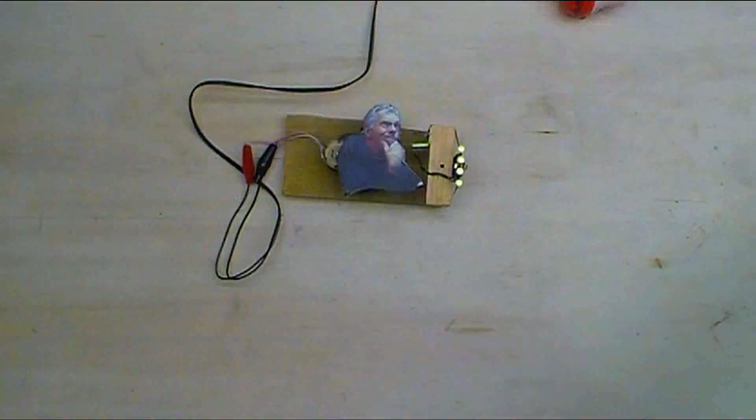So what's up in this episode? Inspection, that's what. We're going to take a look at the primary drive chain, see if there's any stretch on that, whether or not I need to replace it. The cam chain, we're going to look at that, see if that's stretched at all. And I'll also show you how I rounded up all of the bolts that I need for the crankcase halves to go together, and how I determined which ones go where.

We're looking at the lower crankcase half here. This is the tensioner for the primary drive chain. What I'll do is get everything back together, put the top half of the crankcase back on, and then from underneath we're going to push that up, and we're going to look in the book on the specification as to how far that's allowed to go, and that'll tell me how much stretch there is in the chain.

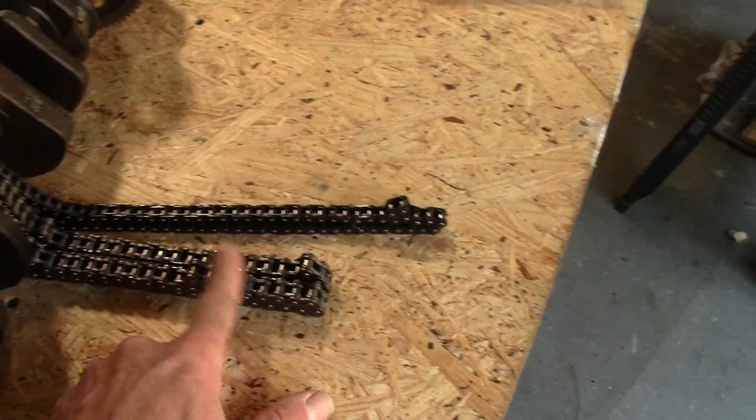And I'll also need to check out the cam chain. That's the smaller one right here. The primary drive is 2 chains. To do that, I'll have to go ahead and put everything temporarily together, slide the cylinders on, put the head in place, drop the camshaft in, same kind of thing. We're going to look at the tensioners and how far they travel. That'll tell me if those 2 chains need to be replaced.

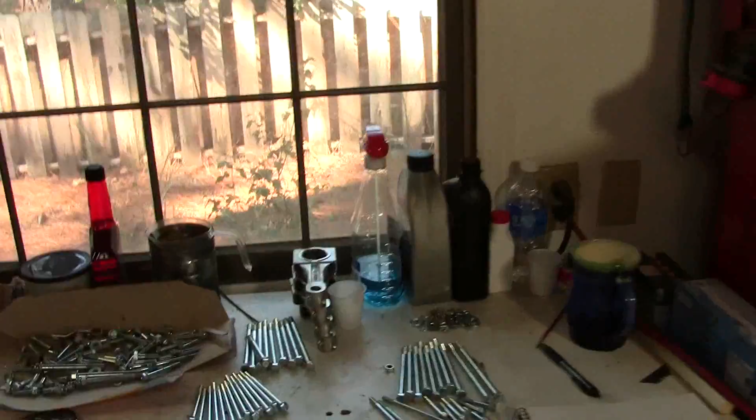Well, before we get into all that inspection over there, we're going to take a look on the bench here. I'll show you how I figured out which bolts go where in the crankcase out of all these miscellaneous bolts I have here. You can imagine when I first looked at this and I see all these bolts and all these holes in the crankcase, where do they go? Well, I went on House of Honda website.

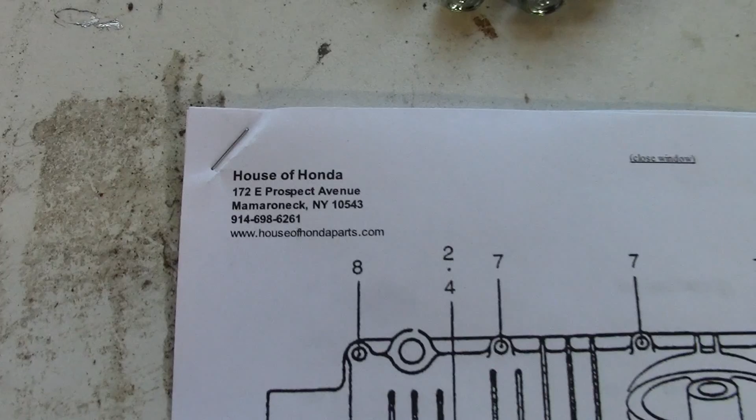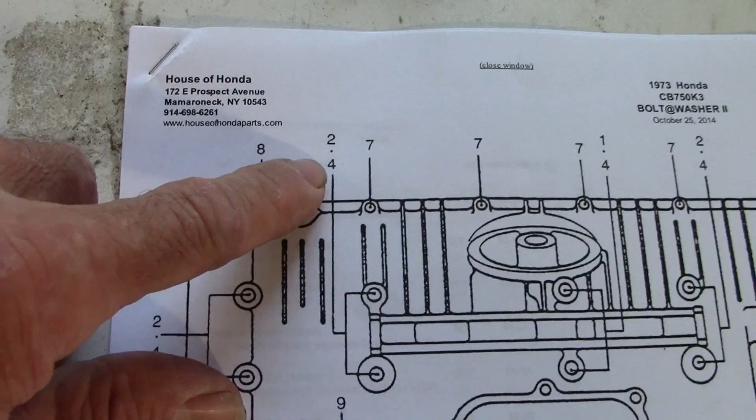Any website that has OEM drawings will have a drawing like this. This shows you the bottom of the crankcase, and all these little numbers and lines point to the holes and what goes in there. So each one of these is a number on a list. For instance, let's take a look at these 2 right here. They're the same number, which shows that it needs a number 2 part and a number 4 part from our list. We'll go over here to the list.

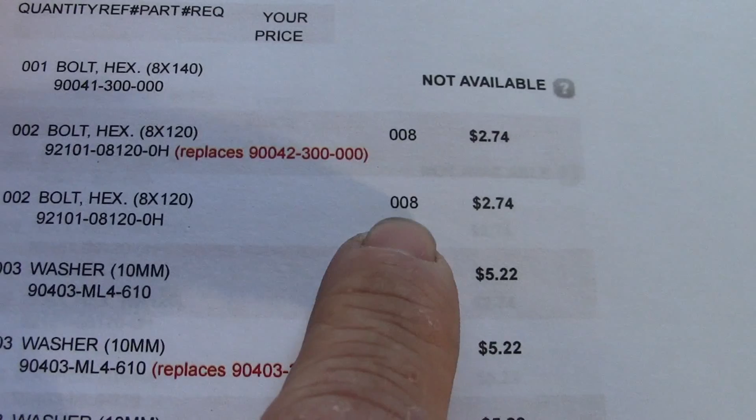Let's look up number 2. Number 2 is a bolt hex 8 by 120. How about that? And we need 8 of those. So then I go over here to my pile of bolts, and if I look around through them and get out my calipers here that I've got set to 120 millimeters, well, look at that. You can see that that's 120. So that's the bolt that goes there.

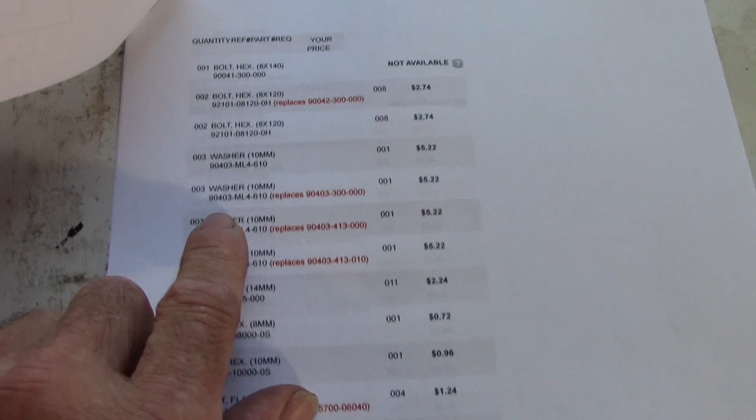And then the other thing that goes with it was a washer right here, and that's how many of those you need. And so you can just use this list like this to determine exactly where all those bolts go.

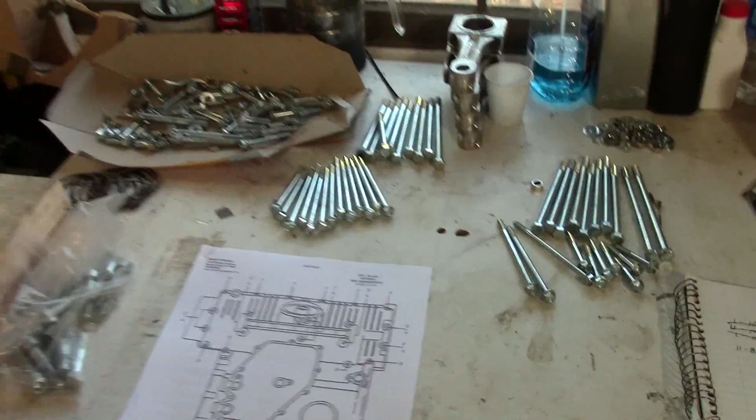And when I got all done, out of all of these bolts that I have here, it turns out that I've got a lot of extras. I think, as I've said before, there's pretty much 2 of everything. I think this guy bought another bike and parted it out, or maybe had one he parted out, but that pile right there represents everything I need to bolt the case halves together. That's it. And then there was a few miscellaneous washers. I went to a hardware store and bought some good hardened washers for those rather than just cheapy ones.

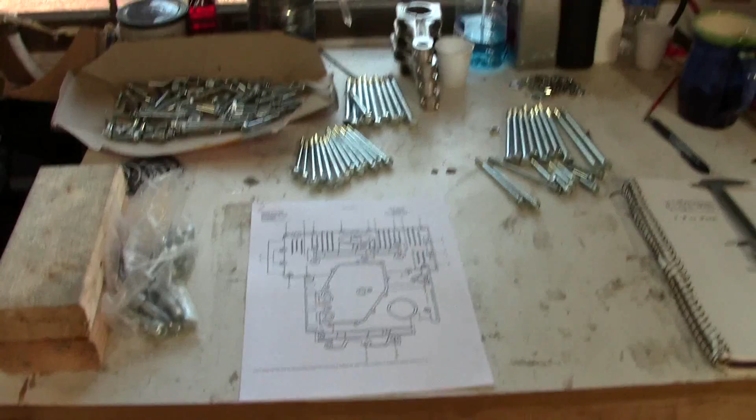So that's the way that I figured out where the bolts go. You can do the same thing on probably any bike that you're putting together. If you've got a pile of parts that somebody else took apart, there's a good way to go about it. And there's also one for the top of the crankcase as well, and all of those bolts that go in there. In fact, every single thing on the bike is like that. So good little tip there to figure out where things go.

Well, let's get back over to the engine now. Here's the crankshaft. What's going to happen now is I'm going to clean this all up, get all the dust off all the journals, and get all the dust off from all of the bearings everywhere, because this has been sitting out.

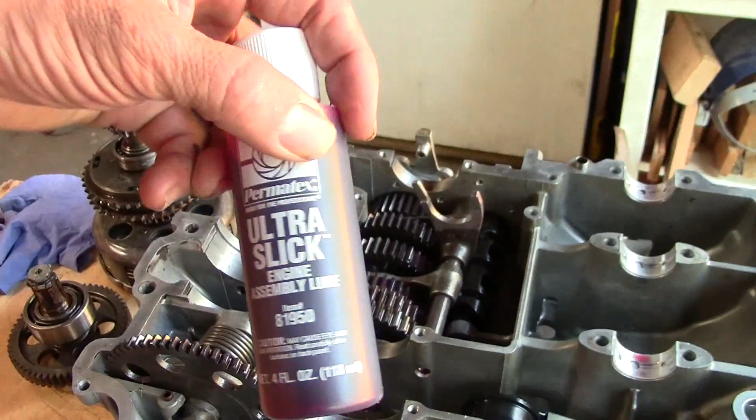I want to make sure there's no little bits of anything in there at all. We're going to clean all that up really well, then use some assembly lube, which is this red stuff you already see in the engine that the previous owner was using when he was putting it together.

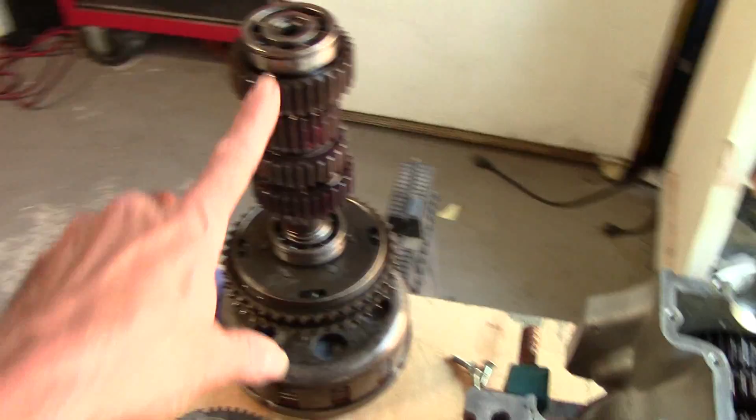We're going to put assembly lube on every single bearing surface, then put the transmission shaft back in, put the crankshaft back in, and put the top of the crankcase on. I'll probably just put a couple of bolts in there to hold it together, then thread the camshaft chain up through everything and just let it sit.

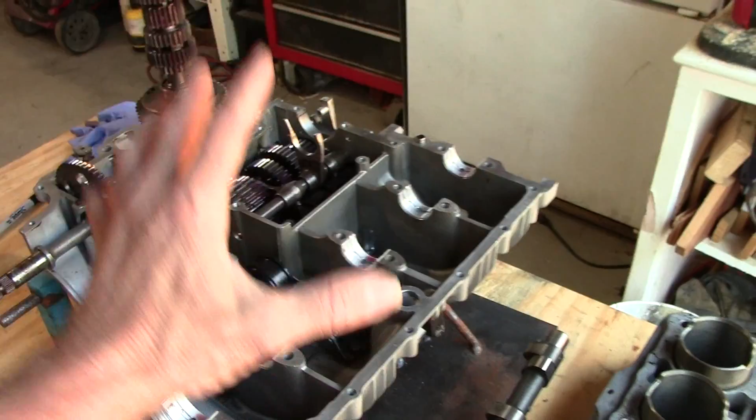The first thing we'll check is the primary drive chain, and once we get that determined, we'll go ahead and slide on the cylinders, put on the cylinder head, get the cam in place, and check out the cam chain. Just clean off all these journals really well.

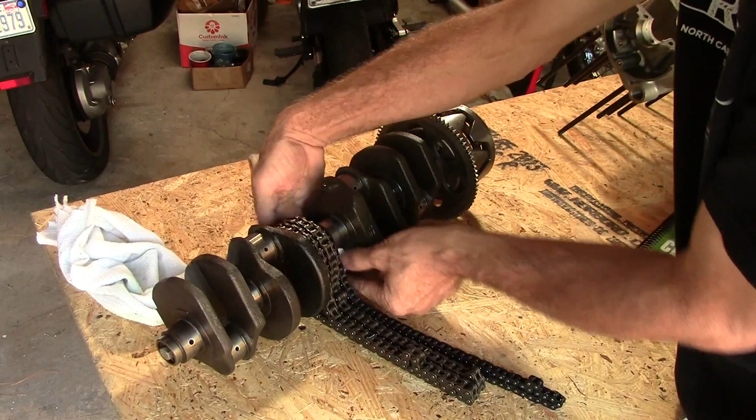Get all the dust, crud, everything out of the way. We don't want any contaminants in there at all. It's really important to keep everything clean on the crankshaft and camshaft journals.

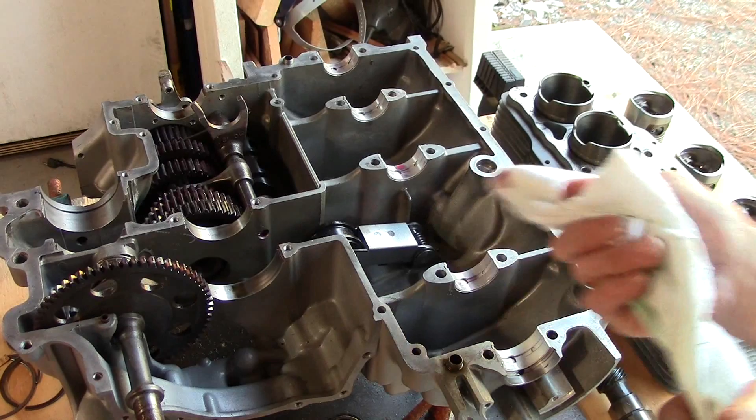We'll wipe down all the bearing shells, get all the foreign matter out of there. Don't want anything in there. This stuff is really soft - you can scratch it with a fingernail even.

Over here where the transmission shaft goes, those are ball bearings in there, and they will just drop right in. I'm going to just clean that off as well.

We'll just wipe down the top of the case half. We don't want anything in there that could get squished between the two pieces and cause any damage. Clean, clean, clean - everything nice and clean.

And over here on the top of the crankcase, same thing - let's just clean it all up really well.

Now right here, there's these grooves that hold these bearings into place with a clip. The clip goes in there and it keeps the bearings from moving back and forth.

I recently saw a post on one of the websites where someone asked why the transmission shaft was coming through the side of their engine after they did a rebuild. It was literally cracking, and I pretty much figured what they did was probably left out those clips. Not a good thing.

Let's get some assembly lube on each one of these. The stuff is pretty thick - just put a little bit on each one.

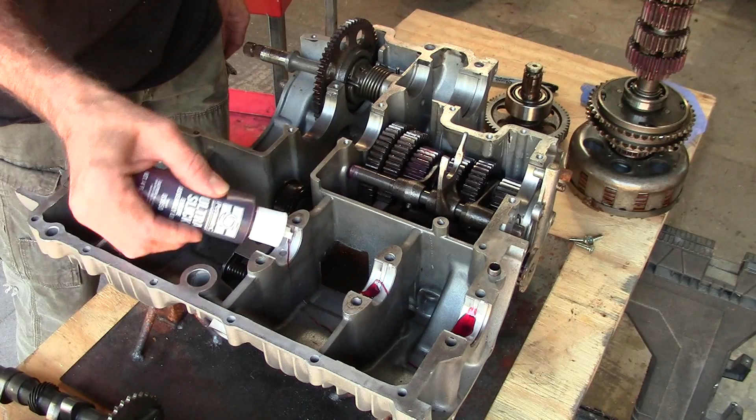Just smear that around a little with my finger. You can see how stringy it is - it's really tenacious, and the reason you put it on is when you first crank over the engine, this will provide some lubrication until the oil pump gets primed and actually starts putting out oil pressure.

Put a little bit of it on the fork, the shift fork here as well - give that just a little bit extra lube. Can't hurt a thing, pretty much anything that spins around. The gears have already been lubed up pretty well.

Now we're ready to drop the crankshaft in. Not literally drop, but gently place it in there.

Okay, that looks good. We'll let the cam chain hang forward. We'll leave the primary drive chain alone for now, right here.

And I'm going to grab the transmission shaft, and we've got to put the chain over the top of that. So what I'll do is just lift up the chain like this, get it threaded over everything, and get the chain on the sprockets.

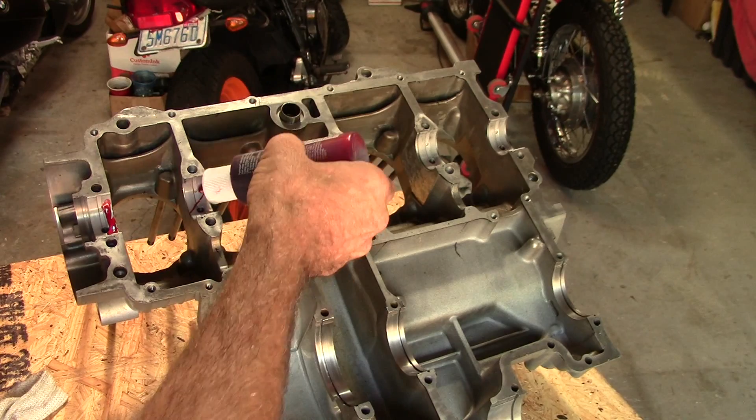Same thing, we'll smear that in with the finger a little bit, making sure it's covering the whole bearing surface. And we're ready to drop this thing onto the lower half.

Okay, so I'm going to take the timing chain and just kind of let it sit like this. I can reach down in there and pull it back up that way. It's out of the way of everything so that the case half will go right on there.

I will get the case half over here and gently set it down on everything. It'll just kind of drop into place on the alignment dowels. Now back here it's hanging up a little bit because I need to line up those grooves.

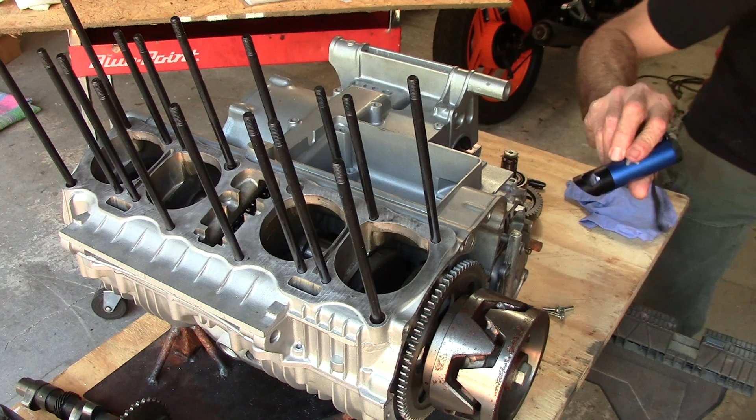Get a flashlight to take a look in here. It's got to go that way just a little bit. Still hanging up a little bit on one of them here. There it goes. Make sure it's down all the way.

Now we'll reach in here and scoop up that timing chain. That's that. Okay, now we can get a couple of bolts into the crankcase halves to hold them together.

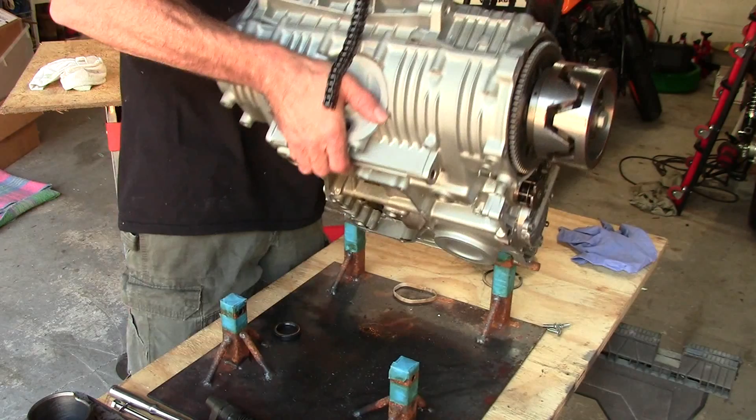Well, the previous owner built this temporary stand. He welded it together, and the way it's designed, you can actually tip up the crankcase just like this. So I can get underneath here and put a few bolts in.

Let's see, the ones I'm after are going to be these right here, and these right here. I'm only after snug at this point, not torqued to spec, just good and snug. All right.

Now let's take a look at that primary drive and see what the slack is there. Okay, let's flip the entire thing over now.

Carefully, gotta make sure that I don't get this past the point of no return on my sawhorses here. Alright, let's get a closer look.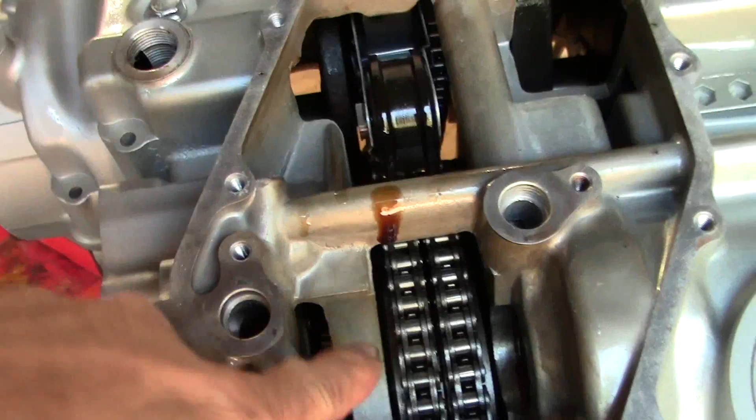So there's the primary drive chain, and right here is the tensioner. You can see that it can move a little bit, right there. And what we're going to look at is a certain dimension between this edge and part of the tensioner. If we go over here to the manual, you can see exactly what's going on and where to put the vernier caliper to do the measurement.

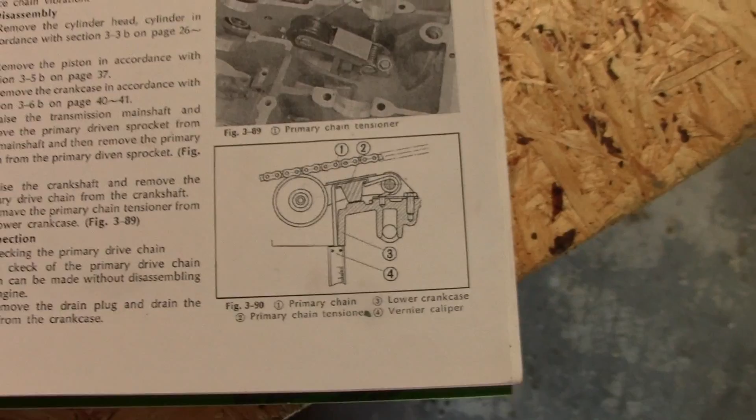And I looked it up, and if it's 70 millimeters or more, time to replace the primary drive chains. So let's get in there and measure it up and see what we got.

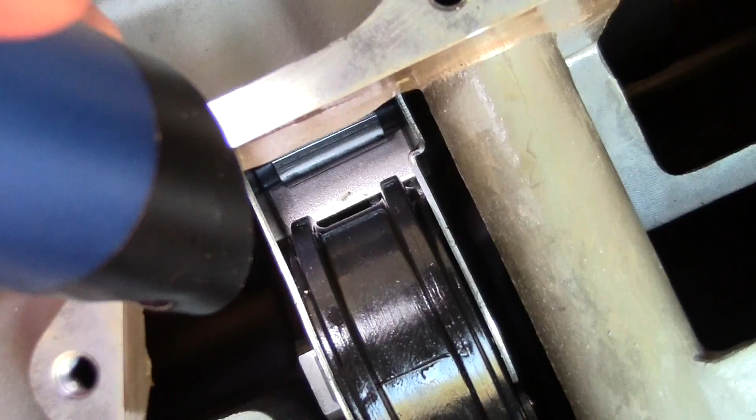The place we want to measure is right there behind that wheel, that shiny flat surface that you see. We want to measure there between that and the edge right here of the crankcase, and that's going to be our dimension that we're after.

Okay, let's make sure we're set to zero. I'm going to use the depth gauge end here. Just push it down in there, make sure it's got full tension on it.

Right there, and our measurement is 64 millimeters. So that's good. That means there's 6 millimeters left of wear in there. That's good. That's a primary drive that's in good shape.

So that's good news. Now we can move on to the cam chain. I've looked through my books and I can't really find a specific measurement like with a depth gauge on the stretch on the cam chain.

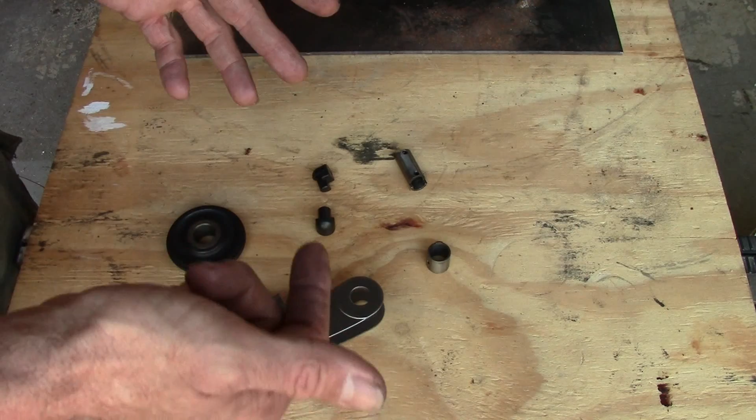So what we'll do is we'll just put everything together and use the tensioner itself and the travel on there to determine how much wear is left. It does have a limit. It can only push the chain tension so far.

So anyway, we've got to assemble the cam chain tensioner. This is all brand new parts right here, and the way this is all going to go together is actually on the chain itself. You have to thread the chain through here, then you put all this stuff together.

This little bushing right here has a notch in it on one side right there, and that notch will stick out and it will go into that little place right there on the roller holder, and that's what will keep that in place.

And then these two rubber things will insert here into the dowel pin, the shaft that goes through that tensioner, and that's what holds it in place in the crankcase. So let's get a little different view here and we'll put it all together.

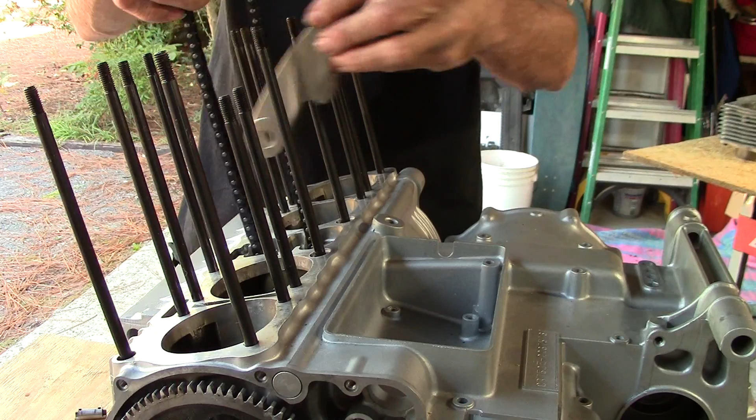Okay, here we go. So let's pull the chain up like this. We're going to take the tensioner and drop it on there. The small wheel will go toward the top, the big wheel towards the bottom, and the small wheel is outside the chain pointing toward the back of the bike. This flat section is what the tensioner pushes against, and that points towards the back of the bike.

And we'll take the lower wheel with that small insert in it, noting where the tab is. That little tab is facing towards me. We'll go ahead and push that in there and rotate it around until the little tab lines up. It's a little bit tricky. Another pair of hands would be nice.

Okay, now we'll get the pin through there. You might have to wiggle the wheel back and forth a little bit to get it to poke through. Okay, that's through. Now we put the rubbers in, little rubber mounts, into the pin. They go a certain way so that they lock into place. It's pretty obvious.

Now these will rotate around to where the flat side of the rubber is pointing up, and then it goes down here and drops right into this spot on the crankcase very nicely, just like that. You'll notice that they'll want to rotate a little bit, but when the cylinders are on there, they'll be held in place okay. Alright, so that takes care of the tensioner.

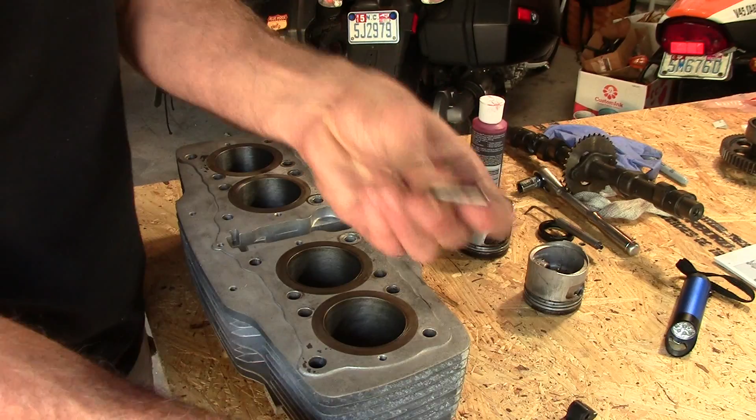So here we have the cylinder. Here's the guide. This is the pin for the guide, the lower pin. And these two parts right here, we're going to drop into the cylinder and go into those slots right there. This is towards the front of the bike. This side with the raised groove on it, this little notch, that points towards the chain.

So what we'll do is we'll just drop that in there like that. It drops into those two slots, so you can see that it's free to move around. Let's just turn this around, take the little pin, push it through the lower portion, center it up nicely.

Now we'll take this and put it onto the crankcase. Now what you're after here is to get that pin that I just put through that lower tensioner to go right into these two grooves on the crankcase.

Okay, now things get a little tricky here. This is where some assistance is nice. I wish I could get all these crows down here to help me. Anyway, I got a piece of copper wire on the chain here, and I'm going to thread that through the cylinder down here where the chain would go.

And then pull it up over the top, kind of hang on to it at the same time that we get the cylinder up onto the studs. I'm going to take this piece of wire and just bend it over. That'll hold the chain for me. Now I can line up the cylinder on the studs.

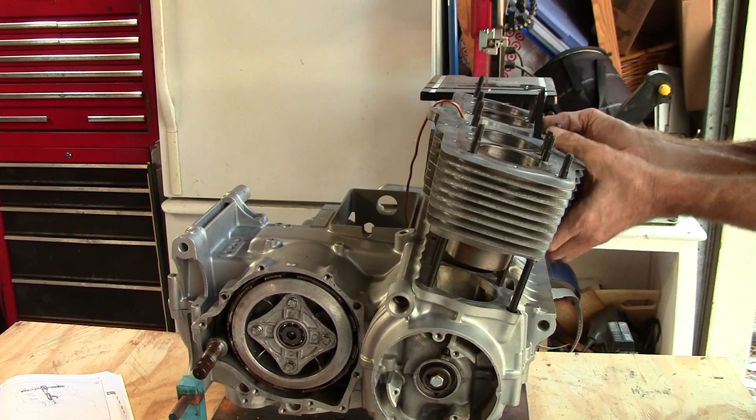Now you can imagine doing all this with the gaskets and everything in place, and then having to put pistons in and line up the rings and all that jazz. So that's why people have made that suggestion of making the wood blocks when it comes time to do the rings. Okay, so let's pull that up.

Make sure that this is pushed in all the way. And we're going to also make sure that as we lower it down, everything clears okay. And let's not drop that chain.

You may have to push the tensioner back a little. And then take a peek underneath. Make sure the tensioner's lining up in the slots. Or the guide, I mean. Make sure the guide is lined up in the slots. There we go. It's on there.

So now I can take this piece of copper wire and just put it there to hold the chain in place for me for now. This is the cam chain tensioner.

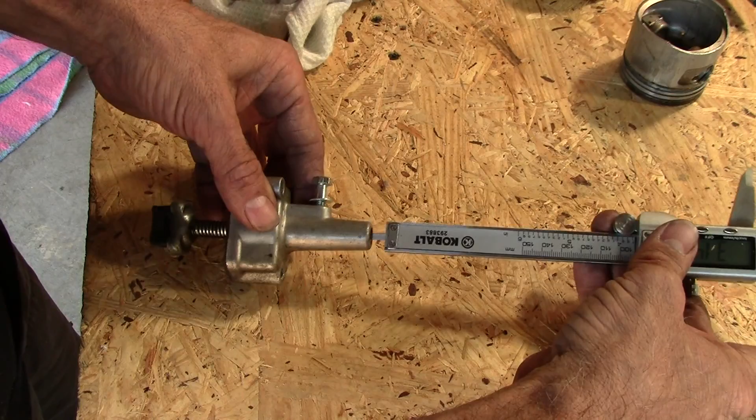I'll loosen up this bolt right here, and you can see it can move in and out with that spring. So that's the maximum travel we get right there. What I can do is take my calipers, turn them on, zero them out, use the depth gauge, and since it's all the way out right now, I can poke it down in there and get an idea of that dimension. That's about 23.95 millimeters, so let's lock that down.

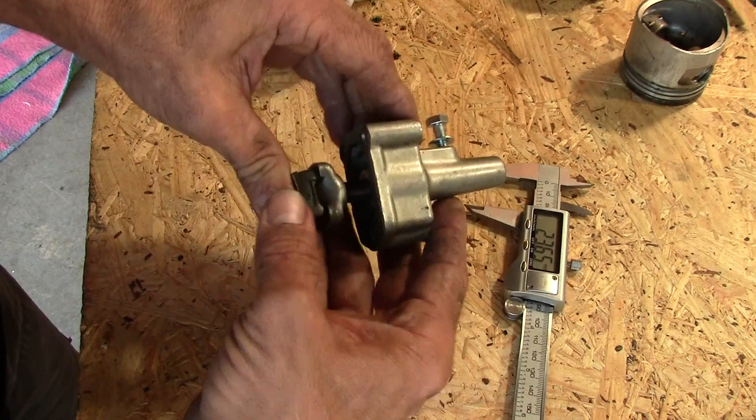Now we'll take this and push it all the way back, tighten up the screw just a little bit, lock it in place, and then we'll put this onto the cylinder and attach it with the bolts and tighten it down. Let's put the tensioner on there.

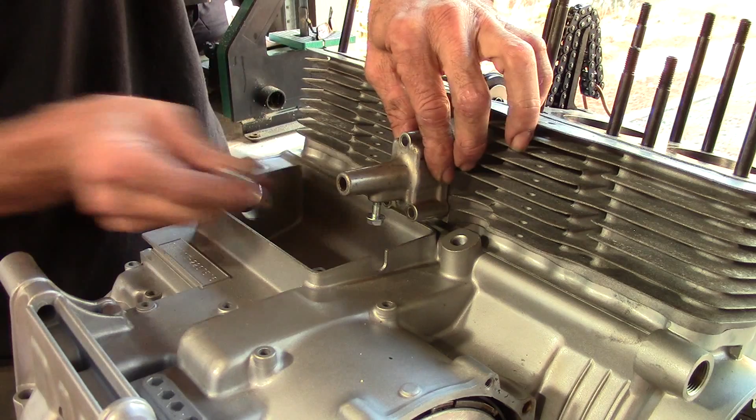We'll get some bolts in there to hold it in place, and spin those in. Just like everything else, we're only after snug right now. It doesn't have to be completely torqued down - this is just to check things out.

All of this is really worth doing, because if you do it later and find out the chain is stretched, how much does that suck? You've got all your gasket material on there, and you've got to back up and do it all over again. Now we're ready to put the cylinder head on.

I have two complete engine gasket sets - one has been opened, the other has not. From the opened one I pulled out a head gasket because I want this thickness on here so it raises the head up to the proper dimension it'll be when the engine's finally together, because that may affect a little bit of the tension on the chain.

The further up it is, of course, the tighter the chain will be. I probably could have put the base gasket down below the cylinder, but it's pretty thin - I really don't think it would make much difference. This one is almost a millimeter thick, so it's really worth taking the time to put it on.

Alright, let's drop this in place. There we go. Now we'll get the cylinder up there. Same procedure - we're going to take this piece of copper and poke it through the cylinder head in the same location that the chain goes.

And let's pull that through and bend the wire over. Now we can line up the studs. Where are you guys? Oops - that's okay, because I got the wire there. Alright, pull that back up.

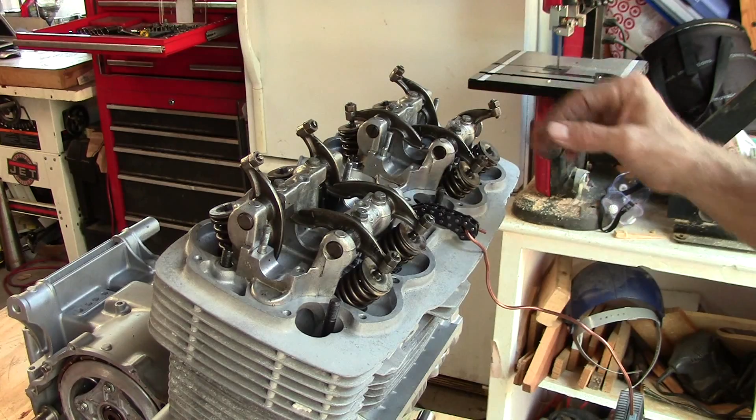Now I wasn't sure which one of these was on the left and right side of the engine, so what I did was take a look at the camshaft - the tachometer drive goes over onto the right side of the bike, the side with the brake on it. And if I put it in here, I can look at the camshaft and see telltale wear signs, and usually you can match those up to the journals. This one right here has a couple little wear stripes in it, and so does the camshaft right here, so now I know I've got these back exactly where they were.

I'm going to pull off all of the rocker arms temporarily.

This will just make things a lot easier to drop the cam in. It looks like they were just kind of dropped in place. Everything's already loose, and we want to keep those where they were as well.

Try to keep everything right back where it was when you put an engine back together. Things tend to wear into each other, and it's best to try to put them back that way. So you pull out those two and then slide this out the other end.

Almost lost my chain there. As I said, we'll keep those down here on the bench, keep them in order.

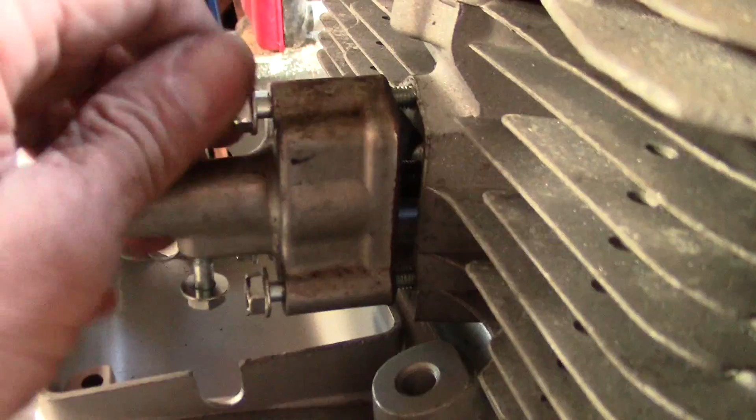Before we can get that camshaft in now, we need to back off the cam tensioner. We'll just leave those bolts in, but back it off all the way. You can remove it as well, because we need as much slack in the chain as we can get.

Now we'll take the cam sprocket, put it onto the camshaft, wiggle it around there. This is where things get really fun. You got the sprocket slid onto the camshaft, okay?

Drive gear for the tach over on the right side of the bike, and we're going to just take this whole assembly and start working it through the chain. It's a little bit of a wrestling match. You have to turn the cam a little bit, turn the chain a little, take your time, keep working your way through till you get over here where the cam will almost drop into place.

Now take this part of the chain, pull it all the way forward, get it onto the tensioner, and get the sprocket started there. Alright, now you want to wiggle the camshaft in such a way so that the two mounting flanges over here are pointing like this.

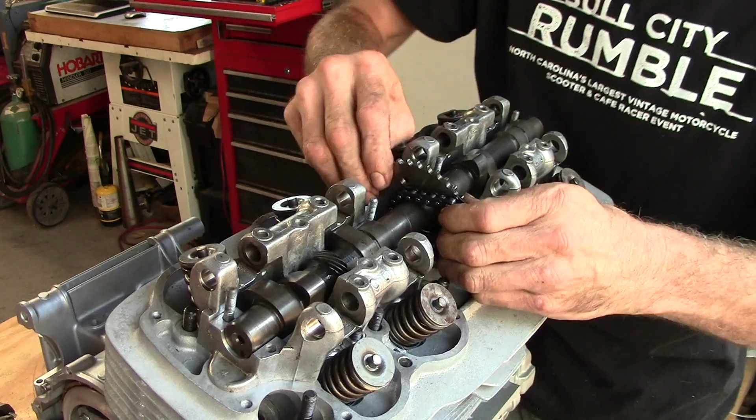That allows you to have the proper clearance that you need to mess around with this sprocket and get it started onto the chain. It's really tricky.

It can get pretty frustrating, and it'll probably get a little bit easier when I've got the head torqued down that little bit extra, and that head gasket is squished just a little bit more. When it comes time to do this and actually get the timing all right on this, it's going to be a lot of fun.

So anyway, now that I've got that much of the chain started, I want to give the camshaft a little push. Now it's down into the journals all the way, and I can wiggle this around a little bit.

What I want to do is get this part of the chain over here forward. It'll clear everything. This part of the chain is as far that way as I can get it. I start working it around, and there it goes. It drops on at that point.

Now you slide this up onto the camshaft, and then you rotate the camshaft around till it's lined up on those two holes, and you can get your bolts in.

Now when you do this and you're timing the cam, it's in a whole different position than this. But for now, we're just going to run one bolt in, and we're not even really going to tighten it up much. It's just got to be on there so that the cam sprocket's held in place.